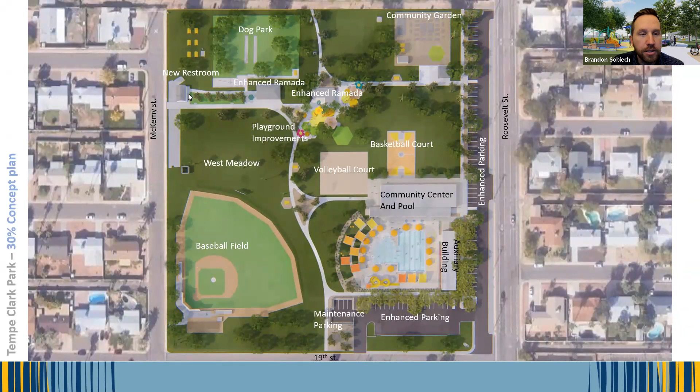The other main and key move was actually tying in and locating the new restroom within the community center and pool complex, so it's more centrally located to all the amenities. If you recall from the previous plan, it was just to be replaced in its current location by McKemy, which kind of isolates it. Through conversations with the city, we felt it was more efficient and more visible and usable to be tied into a centrally located spot where you get more eyes on it, more activity around it, and it has much better proximity to the basketball court, volleyball court, play improvements, and the same proximity to the baseball field. So that's kind of the plan update.

So you can see still have a north-south connection connecting to 19th Street, and then a wider, almost like a multi-use trail connection coming from Roosevelt to McKemy, a nice wide 10-foot sidewalk that leads you into the play area, and then also the community garden for increased access. And you can see a new Ramada as well that's now located south of the playground improvements, which serves not only the playground, but the volleyball court, the basketball court, and has a nice relationship to the community center and pool. So we'll go through the presentation, giving you updates area by area.

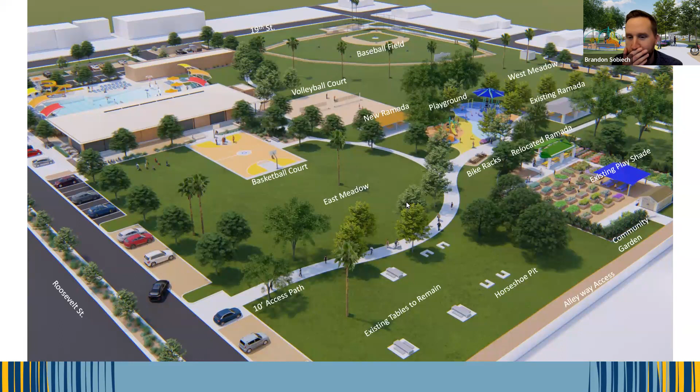I know looking at some of the names on the call, some look familiar, Ken, Frank, and such, and I know there was an interest in the garden. We've been reaching out to Morgan and the garden leadership and have walked through the reasoning and the plan shift of moving the garden location. So we'll start here today, just to show you where the garden's located and what's included in those improvements. As you can see, it's got a nice meandering path connection into the proposed garden location, which has a nice relationship to the playground.

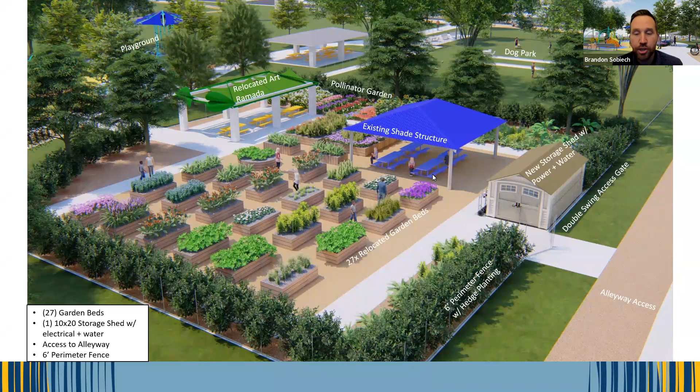That existing shade structure would remain, and we'd be able to bring picnic tables and those types of facilities underneath it. With that, a new storage shed and water and power. There's been a request to have a utility sink, so that would be included. Also included would be the relocated art ramada that's currently out at the garden, and then all of the beds. Basically everything that's out there would get relocated into this area, secured with a 6-foot high perimeter fence.

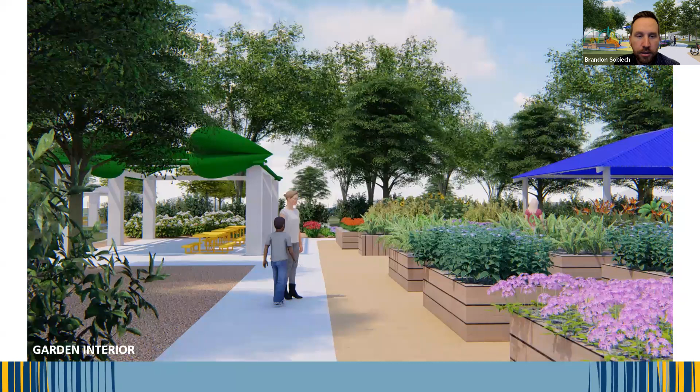With gates both to the park and then back into the alley. You can see some of the shots, kind of entry into the park, and kind of within the garden area, looking towards the dog park area. Let's see how that kind of sets up.

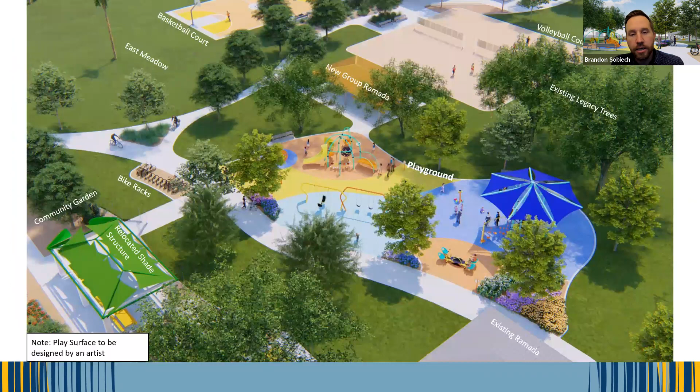Secondly is the playground and the development of the playground. After the master plan effort, the city of Tempe led a neighborhood outreach to discuss with the community the types and styles of play equipment that were preferred, and they've really been leading the effort on selecting and moving that forward. Here you can see the new playground layout, generous in its space and the amenities that it's providing, with lots of shade, both structure and trees.

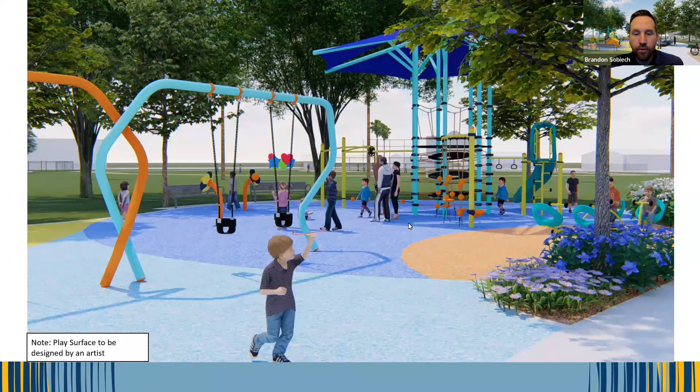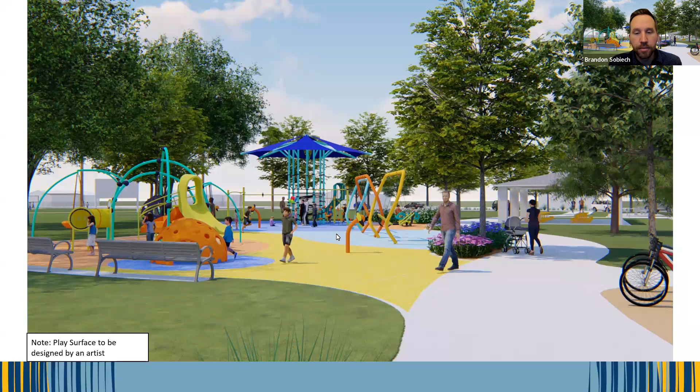And then this artistic form on the ground plane is just a hint at what may be. There's an opportunity that, through the play surfacing and through the city of Tempe, that could be a design by an artist. Here you can see it's separated into several different zones: quiet play and active play, with a 2 to 5-year-old play structure, a 5 to 12-year-old play structure, and then some individual play elements, and then swings.

And here's kind of from the meadow view, standing behind the baseball field, looking back at that play area. So it does have a really nice presence within the park, and can be seen easily from McKemy and from Roosevelt and from 19th, and accessed from either side.

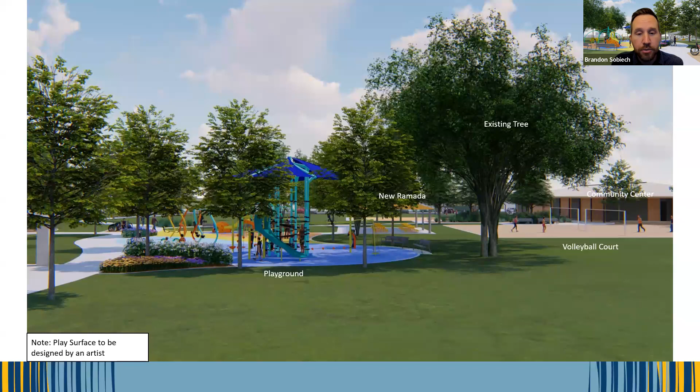We were just discussing today, right before the call, about the public meeting that will be held out on the park on Saturday, mentioning that we're reserving the existing ramada. We had to remind ourselves currently the only accessible route to that ramada is from the McKemey side, and so that will be all improved after these improvements, where the entire site will be fully connected and fully accessible.

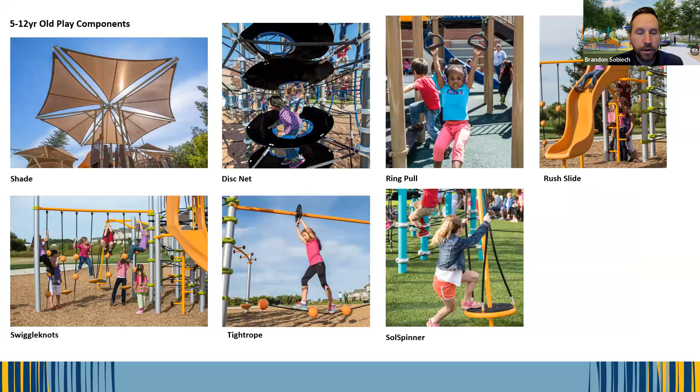Won't get into a tremendous amount of detail on these, because this was really part of the outreach that the city had gone through last, I'd say early summer, when we went out and gave some options for various play elements, then tallied some votes and progressed some selections based on the neighborhood's input. So you can see a lot of various activities of play and various age ranges of play, really broad spectrum from toddler up to early teen in terms of that target audience for the playground.

And then finally, in terms of the site improvements, getting to the aquatic facility, this has been a steady progression from the existing, or where we were at the master plan stage. One thing to note that's a pretty significant change from where we had been to where we have gone, that I think really improves the connection to the neighborhood and that approach from 19th Street and Roosevelt, was the movement of the auxiliary building more to the south.

So it was north-south facing, kind of where these three yellow, orange, and red canopies are located. It had created a wall along Roosevelt, and I think it was a smart move by the design team to go ahead and rotate that and let it live in its own maintenance and operations area, while leaving that view corridor open into the pool, making for a very welcoming entrance from the neighborhood side and really throughout.

So there's really this porosity to the design, where you're able to, from the parking lot, see through the pool, then out to the park and then the baseball field, which is very nice. And then here you can see the community center and pool to the north, and how that engages the facility.

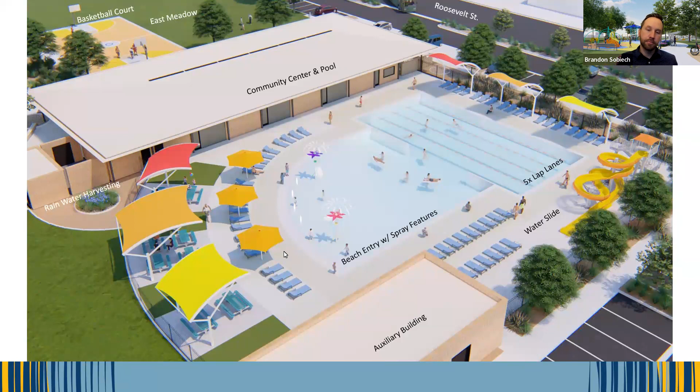The facility and its structure, the pool itself, is programmed to reflect what was approved during the master plan phase, which is a series of fitness lap lanes for community use, for swim lessons, those types of activities. Beach entry with spray features, which would include not only at-grade splash jets at the beach entry itself, which were great for engaging that younger age of child, but also vertical spray elements.

And we like this idea, and it really came from some of the narratives that we read from the community about the love of the garden and the vibrancy of the neighborhood, about trying to pull some of that inspiration from the garden.

So maybe it's a flower theme or plant theme or something like that, that brings that vibrancy and that tie to the legacy of the garden that used to be here and is now still an integral part of the park and the neighborhood on the north side.

Plenty of shade around the edges. There's various scale of shade, from 16 by 16 canopies to 20 by 20, allowing for that picnic activity to happen where you'd be able to come out, have a birthday party here, and kind of lay out space. So we call it kind of breathable space behind the main walkway. That just allows for more flexibility because it really was, again, through that outreach, determined that this is really a family-friendly kind of multi-use facility. So we wanted to continue to make sure that there were opportunities for those types of activities to happen.

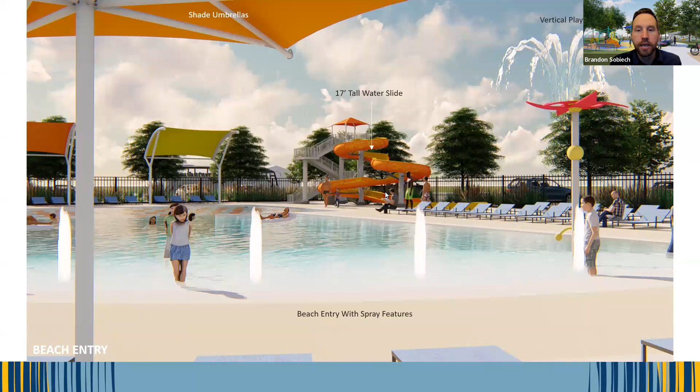And then finally, there is also the water slide. What was really nice is when that maintenance building shifted, it opened up this opportunity to scoot the water slide over to the corner, which really becomes this fun little icon on the corner of 19th and Roosevelt. It's this visual draw in, so when you come into the neighborhood, this will kind of punctuate the corner of the aquatics facility and become a beacon or an icon that welcomes you in.

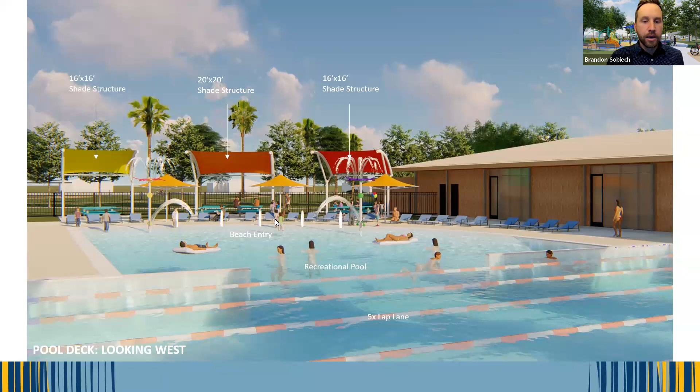So here's a view across the lap lanes. We're counting 5 lap lanes right now with some general pool area and then sloping up to a beach entry to allow for various classes, fitness classes, as well as club and practice lap swimming.

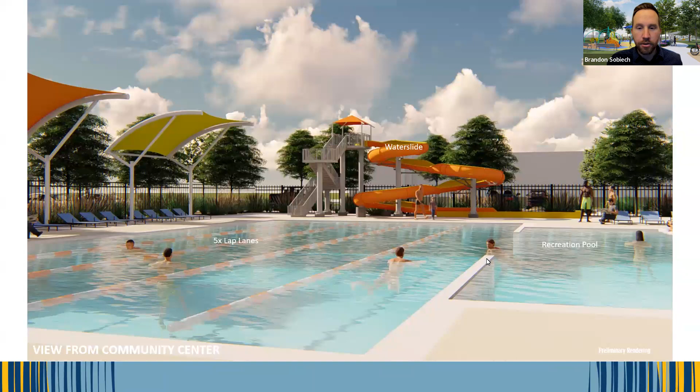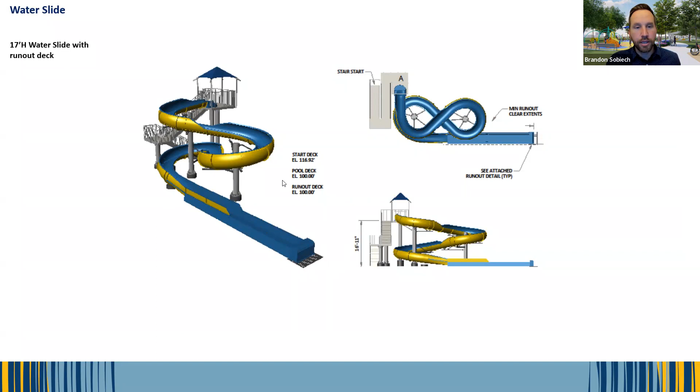And again, another view across to the water slide. An example of the products that we're currently looking at. One interesting thing with the water slide, it actually doesn't output into the pool. It's on deck—you slide, and then through the water system it actually recirculates back up, and then you're able to exit on the deck and walk around.

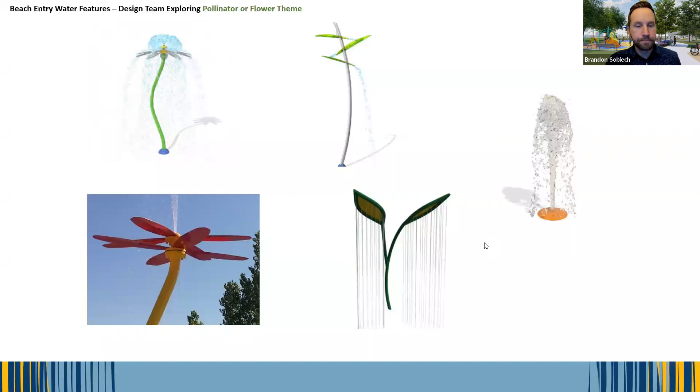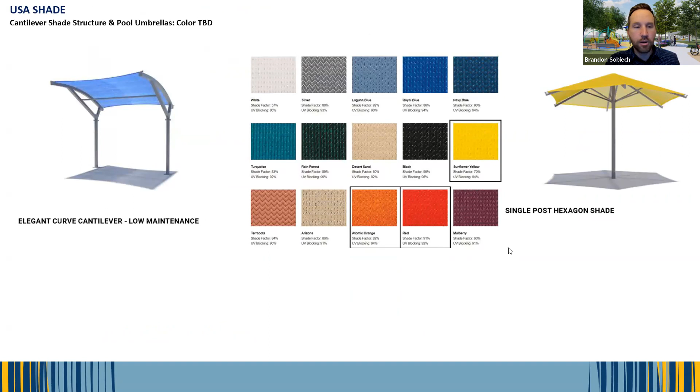And then just some examples of some of the products we're looking at for those vertical features that can bring some of the vibrancy and fun of the garden into the pool area. Some of the shade structures we're looking at, in terms of creating those little spaces for picnicking, and then the umbrellas for shading the lounges, but an opportunity to bring in color. We're working with the city on that color palette, and if you have any thoughts on color palette, that would be good too, as we make those decisions.

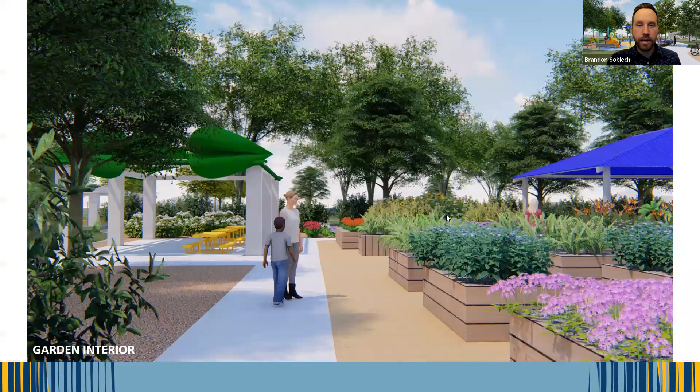And with that, I'm going to pause for a moment and go back up to the plan—apologies for the fast-paced scrolling. But often when there's questions, it's easiest to use this as a reference point. I'll pause now for some Q&A if anyone has specific questions on the advancement of the design in terms of the site. Then after a little bit of question and answer, we'll get into the renderings and plans for the community center.

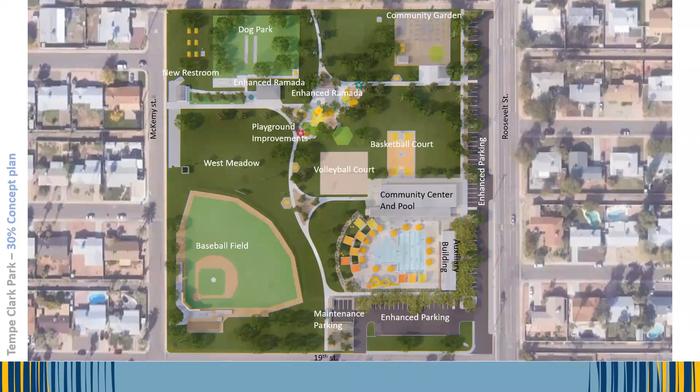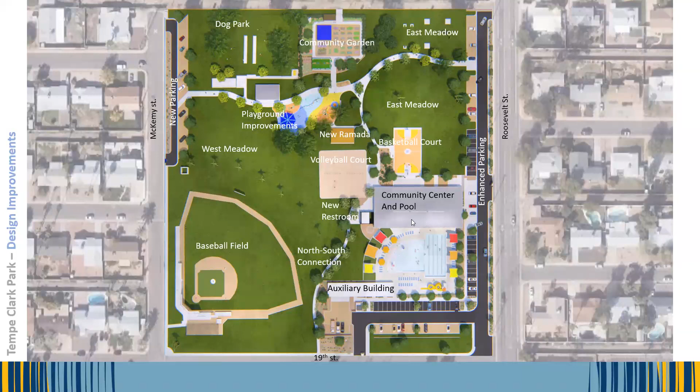Also for the community center or recreation center just north of the pool, it appears in the previous renderings that there was an overhang or structure that served as shade, like a covered patio. It doesn't look like that's in the new rendering, so I wanted clarification. I think it would be nice to have some sort of covered patio area or overhang in that section, as it looked like it previously was in the old renderings.

Thank you, good comments, Larry. On the overhang portion, I think part of that is just how this is rendered. There is a consistent 8-foot overhang with various pockets that overhang deeper, and we'll get into that momentarily, to create outdoor sitting spaces underneath this.

Right now this is rendered as a big gray rectangle, but the building footprint underneath is much smaller. So there is space on both the north side and the south side that is shaded underneath that canopy. Instead of a trellis, it just became a full expanse of roof. So that's that portion of it.

The second comment you made, yes, the pool area to the west did contract a little bit, and most of that was budget driven, making sure we right-size the pool so the project can stay on budget. We still have 6 full shade structures along with patio umbrellas. Part of it is a visual where the whole pool shifted west because the auxiliary building moved to the south, so that's part of the change.

But you did notice there was some reduction in the deck size. The pool area itself maintained relatively the same size.

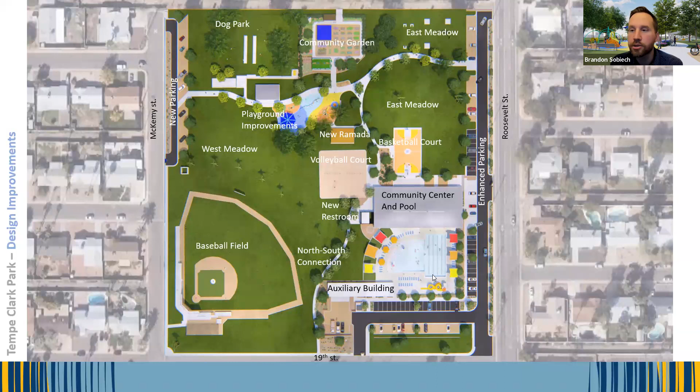Looks like Jordan and Larry still have their hands up. I don't know, Jordan, did you have another question?

I do, sorry. My question is, well first of all, I'm loving the playground, it looks really well informed and actually really interesting compared to most playgrounds I've seen before. I was wondering, and this might come into play more with the community center, if you could elaborate on any specific amenities and provisions designed for teenagers and adolescents. And were the decisions going into those amenity choices informed by gender disaggregated data?

The decisions in terms of the program stem from the early plan outreach, where we went out and asked the community what types of activities they'd like to see in the park, what's currently not being served, what they enjoy in the park, et cetera. That really dictated what remained, what was working well, and what we needed to add.

A big portion of that was the relocation of the playground, making it feel more safe, with age ranges from 2 to 5 and 5 to 12. For teens, the ball fields, basketball court, and volleyball court remain, as well as garden use.

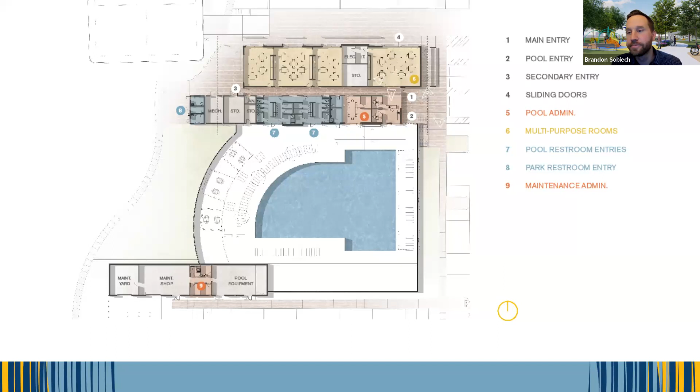Thanks, Brandon. Hi everyone, I'm Diane Jacobs, one of the architects at Holly Street Studio who's worked on this project along with my colleagues Sergio Carrasco, who's on the line, and also Haley Allen.

As Brandon mentioned, this little building, which is not so little anymore, is about 7,000 square feet, plus another couple thousand square feet for the maintenance building, sits in the center of the park. In some ways it's surgically placed exactly where it could fit between the pool, the basketball court, the volleyball court, the baseball zone, and parking. We were able to get all the requested amenities into this space and then some, and tried to create a very open and flexible floor plan so that many different things could happen within this one building over time.

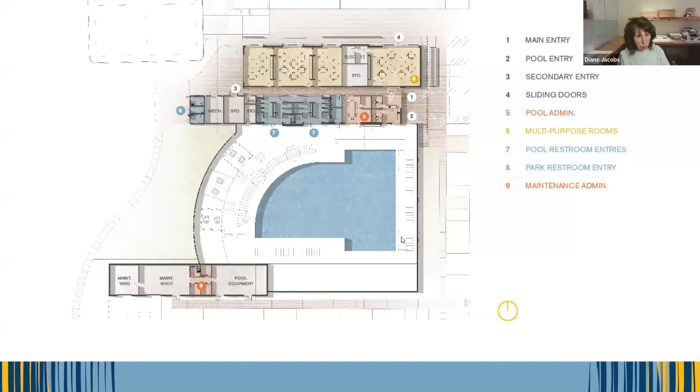One of the questions Larry asked, correctly answered by Brandon, was about shade — and as we get into the other renderings, you'll see that shade is really the story of this building. What we've tried to do is create spaces within, but every space has a generous overhang associated with it, so that not only the inside of the building provides a respite, but the edges of the building do as well. The approach to the recreation center will be more formally and typically from the east side.

You can see number 1 and number 2 are designating where you would come in from the street. Number 2, you could come in, check in at a window, and go straight into the pool. The idea is that you have staff directly accessible to the main entry points with full visibility through the building, both to the north and to the south.

The most important thing about the approach and how this building is sited in terms of the bigger picture is that it's meant to have visibility through the building, both on the long axis and on the short axis, so that staff and those responsible for younger visitors have the opportunity to care for them, keep an eye on them, and make sure everybody is safe and happy.

So moving closer in on the building—I know Brandon, you zoomed in here—what's inside is divided into a series of zones or particular uses, color coded. The yellow on the north side of the plan are multi-purpose rooms. Each of these rooms is meant to be a flexible, day-lit, open space for a variety of activities, both active and more passive recreation.

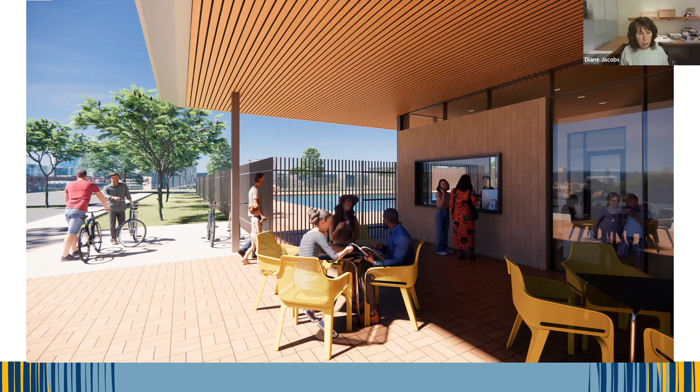Many of the surfaces on this building will be discussed with Rebecca Rothman and the City of Tempe Public Arts community, and we're going to look for inventive ways to integrate art into the facility so it becomes a unique destination and very much a part of your neighborhood. So we can go to the next one.

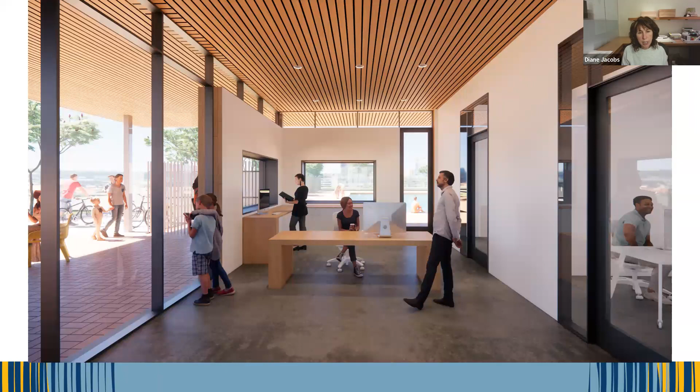This is the beginning of our strategy for the lobby area. You'll come in more or less on the left side of this image. The idea is that staff will have a set area, but maybe an open invitation for folks to come and engage with staff. There are offices to the right side, and you can see full visibility through to the pool zone and to the neighborhood and street. We wanted to pick up on the lines and design vocabulary of the neighborhood's mid-century architectural language, but give it a contemporary twist, making sure it's an interpretation but still very much a building of its time.

We are also going to be designing this building with the guidelines from the International Green Construction Code. So it will be carefully considered with everything from mechanical system efficiency to using responsible products to how we can minimize the load through good construction.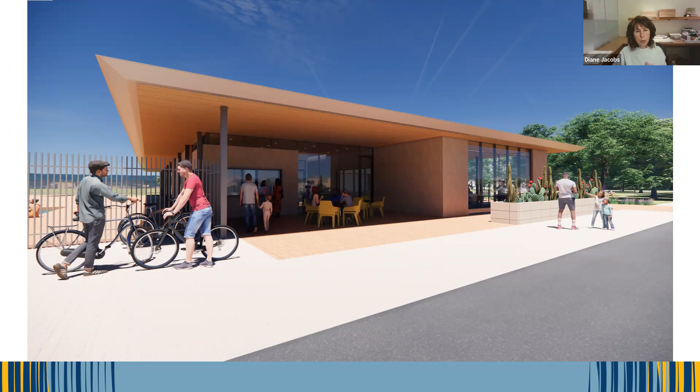Go to the next one. So you can see, Larry, how the previous rendering you were referring to had a building with additive overhang canopies. What we decided to do with our partners at Hayden Building Company was work with them to simplify the structure, and create an integral overhang that's part of the roof rather than an additive element requiring another level of maintenance or attachment to the building. So this floating roof behaves more, we hope, like a park pavilion rather than an enclosed building with additive shade.

You can also see on the right side - go back one - that the idea is that those multi-purpose rooms, while they're enclosed and we can have window coverings, are meant to still be connected to the park.

This area here looks very blank. We'll be working with our partners at Dig Studio, and we are envisioning this to be heavily shaded by trees. So we're not just doing architectural shade, but the best shade of all, which is landscape shade, will begin to get populated here on the north side.

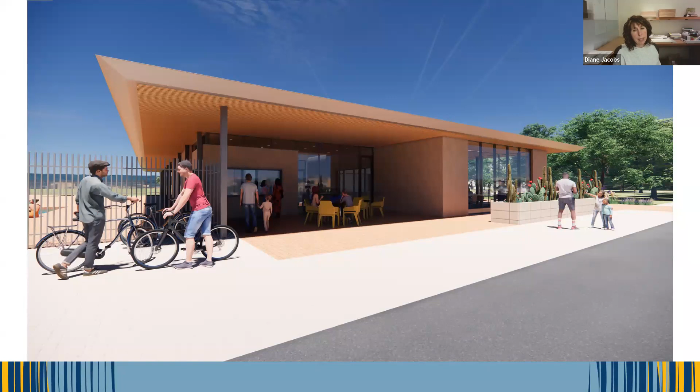One thing we know from doing community centers is that pickup and drop off is really important. So we're trying to create an area here that if someone needed to wait, whether they were coming to pick up or they're waiting to be picked up, there was a safe and comfortable place for them to be. Okay, next one.

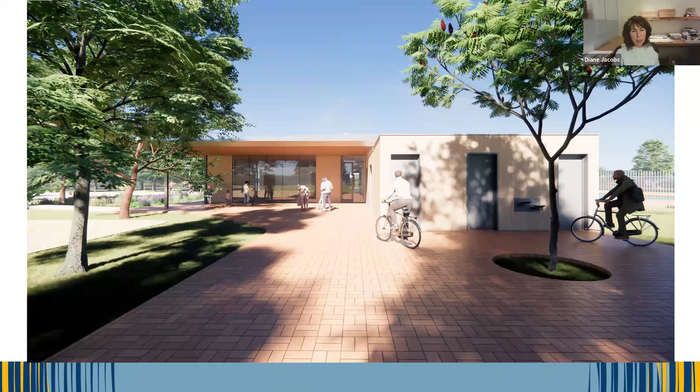This shows the west side, the public restroom building, which is meant to be kind of a bookend with landscape shade near it. You can see that the westernmost multi-purpose room has a very deep overhang, just like at the opening, and what we anticipate is being able to open up those doors and activities to spill out.

So we have a very tight budget in terms of square footage and construction cost on this building, but we always try very hard to exploit that with our beautiful Arizona weather and see if we can't double the useful footprint of this building by providing shade and the opportunity for spaces to open up and engage with the outside.

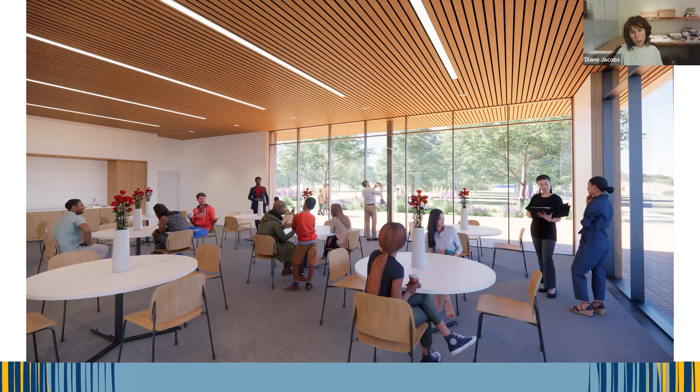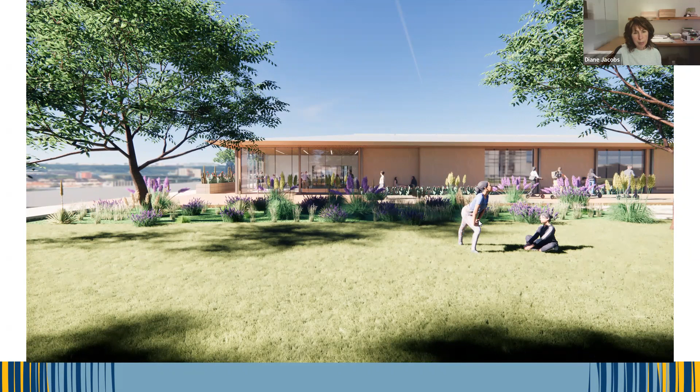This shows from the East Meadow what it might look like looking towards the building. And again, I'm so excited to be working with Rebecca and the arts community to help shape what these available planes of masonry and building and even planters and paving might receive by way of art inspiration and participation in the design of this building.

The building does have a pitched roof. It has a hip-style roof, which is something that's prevalent in the neighborhood, but it's meant to be very long and sort of shallow, with an emphasis on that plane that gives us that much needed and beloved shade, depending on what time of day you're standing on what part of the building.

Also integrated with nature so that you have a sense of connection to the outdoors while you're inside and vice versa. We deliberately kept that meadow pretty open there. There's so much in this park with volleyball and basketball and baseball and the garden and the dog park. We wanted to make sure that there was just a big open field, and as we joke with Vince, a place to play football on Thanksgiving morning. So that was very important to keep.

So I think this pretty much covers the concept of the building. As I mentioned before, we are not hermetically sealed when it comes to our drawings. We are open to ideas and suggestions. Pretty much what we have worked hard to fit in here are program elements, so I don't think we'll be able to at this stage add square footage or additional amenities, but we welcome your feedback on everything else. So thank you for listening.

Any other questions, comments? I don't see any hands. Again, you're welcome to raise your hands or type in the chat. Doesn't look like it. I think that might be it there.

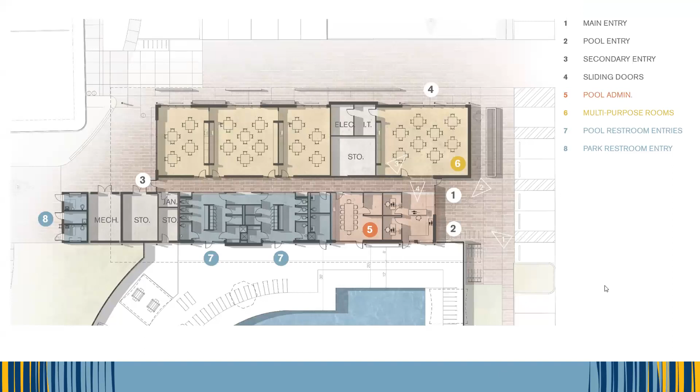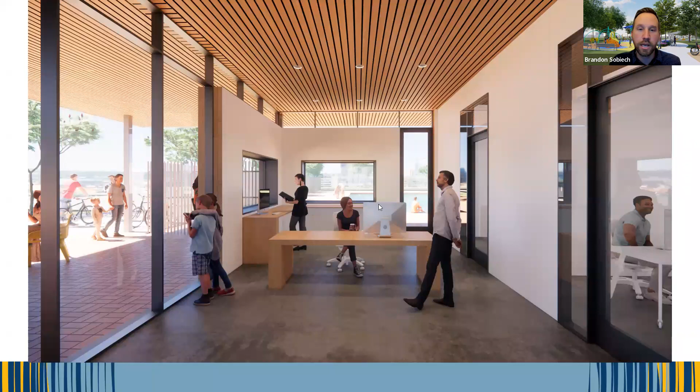Yeah, perfect. Thank you everybody for your time. Again, speaking for the team, we appreciate the opportunity to have dialogue again and receive feedback and look forward to... oh, I'm sorry, I have one more slide that we had not paused on. Apologize about that, Shauna.

All right, actually, before we get into the project schedule going forward, we did get another question in the chat, Diane, from Sean: Will there be programs for all ages of kids and adults?

So fortunately and unfortunately, I don't get to put on the programs, although that would be something I would love to do. But the spaces are designed to accept all kinds of programs for both. So that might be best answered by, I know Mercedes is on the line, or Sean Wagner, or Shauna, if one of you have some input as to what the programs will be in the building, that would be great.

Thanks, Diane, and good evening everyone. This is Sean Wagner, I work with the Parks and Recreation Division. And yes, we'll have multi-generational programming in the facility and throughout the park. So that will continue. We do envision using this as a center too for our adaptive recreation program, so we're really excited about that opportunity as well. And obviously hosting community events and meetings, neighborhood meetings, that type of thing. This facility will be available for that as well.

Perfect, thanks Sean. And then Frank asked about Saturday. Sean, I just saw that you replied, but yes, there'll be an in-person event, we'll have boards up underneath the Ramadas at the park this Saturday from 10 to 11. So if you know anybody that was not able to attend tonight who would like to know more about the improvements that are going to happen, please have them come out to the park Saturday morning. It should be a beautiful day. We'll set up there and be able to discuss casually the improvements that will be taking place. And Brandon, I'd also like to mention that if somebody wasn't able to make it this evening, please let them know they can get it.